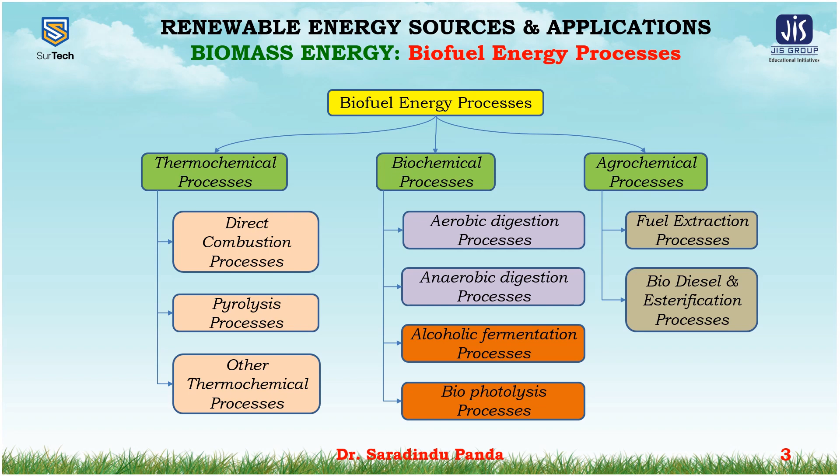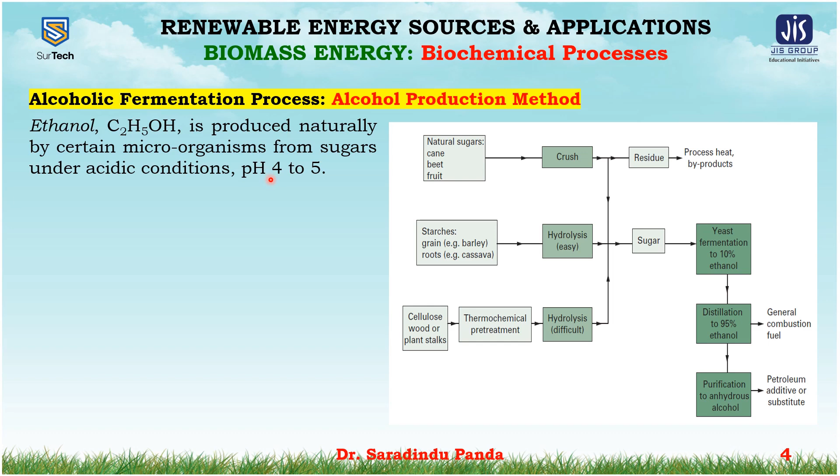In the alcoholic fermentation process, now I want to describe the alcohol production method. The ethanol C2H5OH is produced naturally by certain microorganisms from sugars under acidic conditions where the pH is 4 to 5. This alcoholic fermentation process is used worldwide to produce alcoholic drinks.

The most common microorganism, the yeast Saccharomyces cerevisiae, is poisoned by ethanol C2H5OH concentration greater than 10%, and so stronger concentrations up to 95% are produced by distilling and fractionating as shown in the figure.

Hydrolysis, the crush, and the yeast fermentation give 10% ethanol, then the distillation process will occur, then we will get 95% ethanol, then purification occurs to anhydrous alcohol, which is the petroleum additive or substitute.

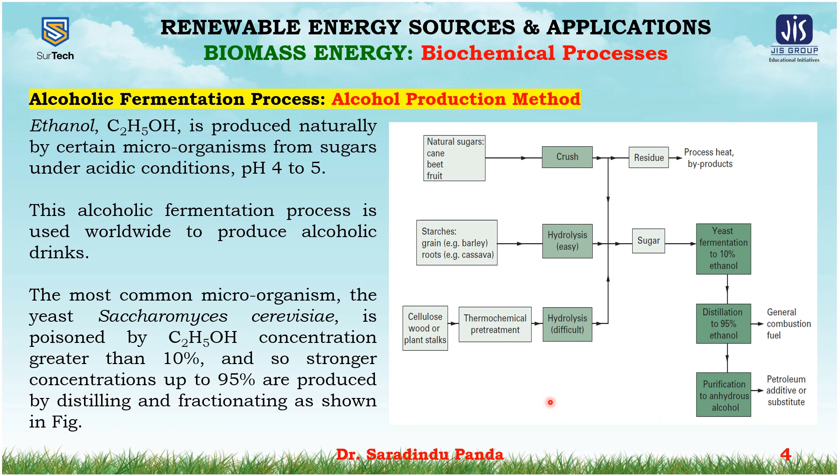When distilled, the remaining constant boiling point mixture is 95% ethanol and 5% water, which is shown in the figure. The anhydrous ethanol is produced commercially with azeotropic removal of the water by an extra process such as co-distillation with solvents such as benzene or the use of molecular sieves.

Only about 0.5% of the energy potential of the sugars is lost during the fermentation, but significant amounts of process heat are required for the concentration and separation processes. This process heat may be provided from the combustion or gasification of otherwise waste biomass and from waste heat recovery.

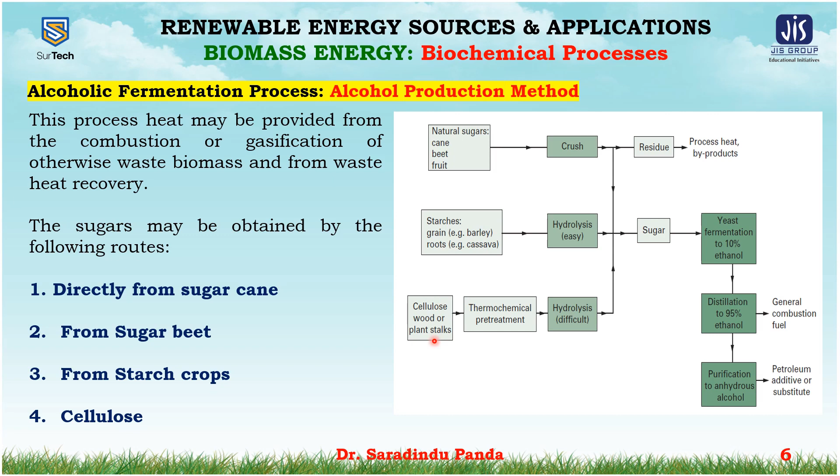The sugars may be obtained by the following routes: directly from sugar cane, from sugar beet, from the starch crops or grains or roots, and the cellulose. Now come to the sugar cane directly. In most cane producing countries, commercial sucrose is removed from the cane juices, and the remaining molasses is used for the alcohol production process as shown in the figure.

These molasses themselves have about 55% sugar content, but if the molasses have little commercial value, then ethanol production from molasses has favorable commercial possibilities, especially if the cane residue, that is called the bagasse, is available to produce the process heat.

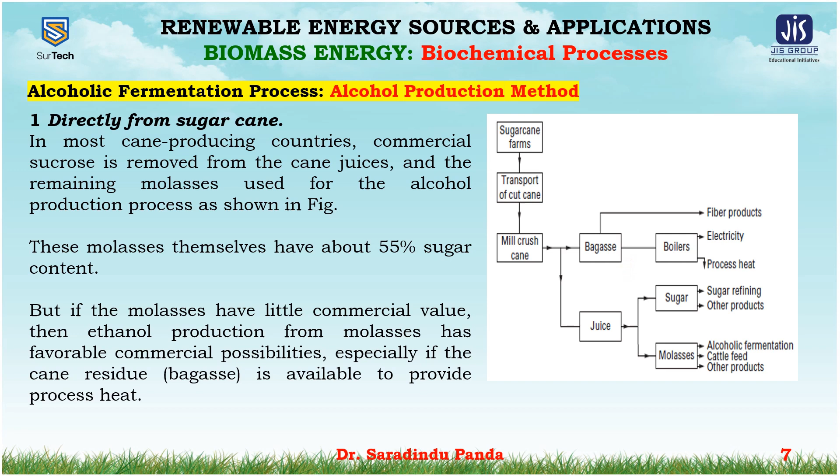The major reaction is the conversion of sucrose to ethanol, that is C6H12O6 to 2C2H5OH plus 2CO2. In practice, the yield is limited by other reactions and the increase in mass of yeast. Commercial yields are about 80% of that predicted by the above equation. The fermentation reactions for other sugars, just like glucose or sucrose C6H12O6, are very similar.

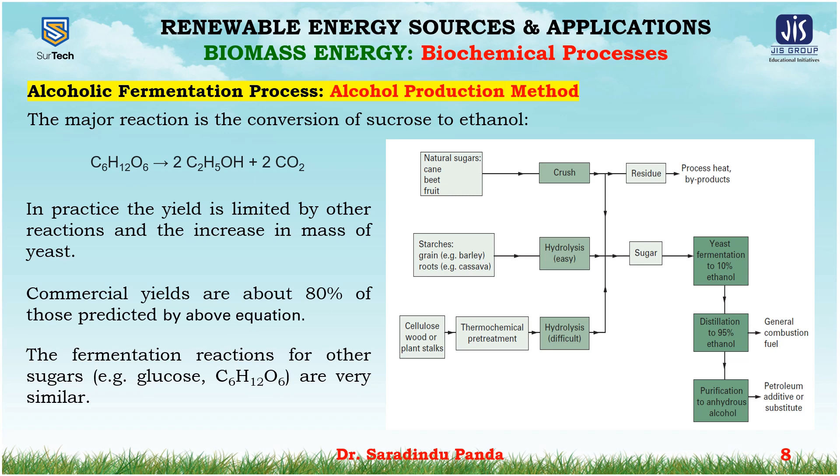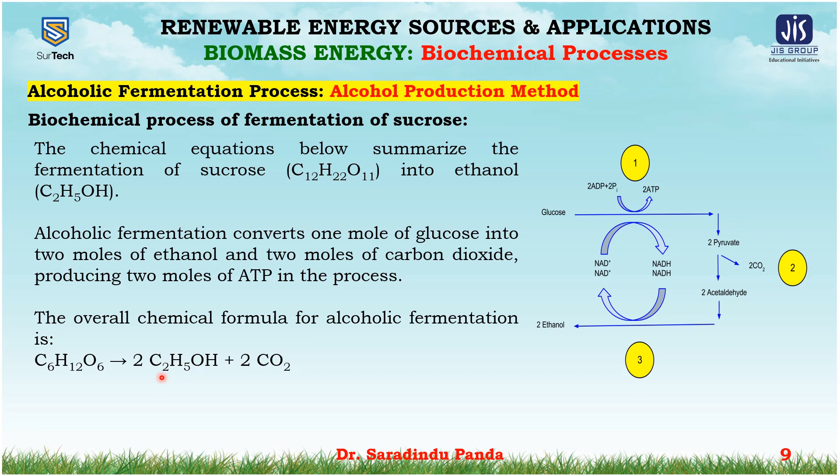The biochemical process of fermentation of sucrose. The chemical equations below summarize the fermentation of sucrose into ethanol. Alcoholic fermentation converts 1 mole of glucose into 2 moles of ethanol and 2 moles of carbon dioxide, producing 2 moles of ATP in the process. ATP means adenosine triphosphate. The overall chemical formula for alcoholic fermentation is C6H12O6 to 2C2H5OH, that is ethanol, plus 2CO2. Sucrose is a sugar composed of a glucose linked to a fructose.

In the first step of alcoholic fermentation, the enzyme invertase cleaves the glycosidic linkage between the glucose and the fructose molecules. C12H22O11 plus H2O plus invertase gives 2C6H12O6. Next, each glucose molecule is broken down into 2 pyruvate molecules in a process known as glycolysis.

Glycolysis is summarized by the equation like this: C6H12O6 plus 2 ADP plus 2 Pi. Pi is the inorganic phosphate, plus 2 NAD+. NAD means nicotinamide adenine dinucleotide ion.

Then we will get 2CH3COCOO−, which is called pyruvate, 2 units of pyruvate, plus 2 ATP plus 2 NADH plus 2 H2O plus 2 H+. So CH3COCOO− is called the pyruvate, NADH is the reduced nicotinamide adenine dinucleotide, and Pi is the inorganic phosphate.

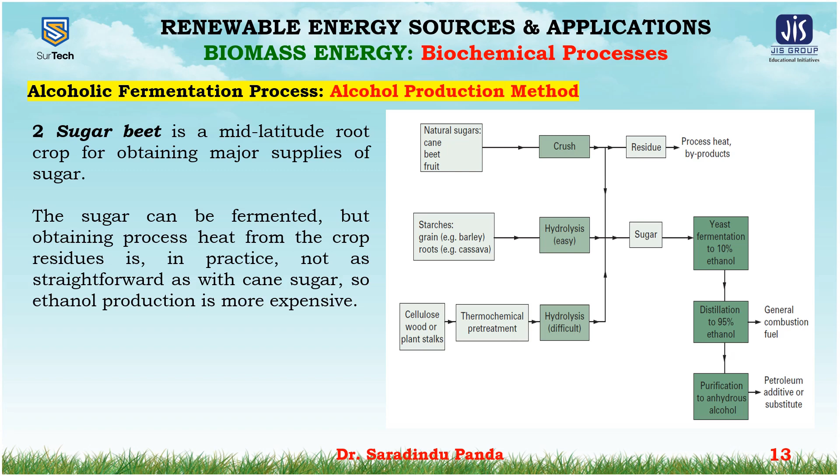Third one is the starch crops. Starch crops means grain and cassava, which is shown in the figure, can be hydrolyzed to sugars through hydrolysis. Starch is the main energy storage carbohydrate of plants and is composed of two large molecular weight components. One is amylose and the other one is amylopectin.

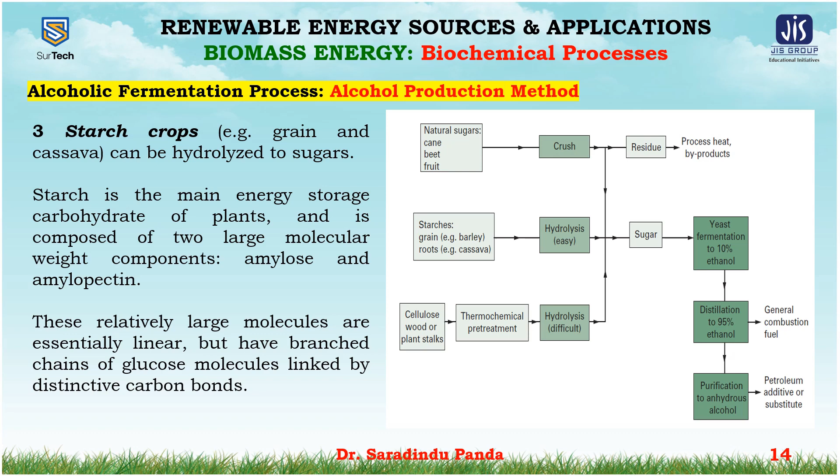These relatively large molecules are essentially linear but have branched chains of glucose molecules linked by distinctive carbon bonds. These links can be broken by enzymes from the malts associated with specific crops, such as barley or corn, or by enzymes from certain molds, like fungi.

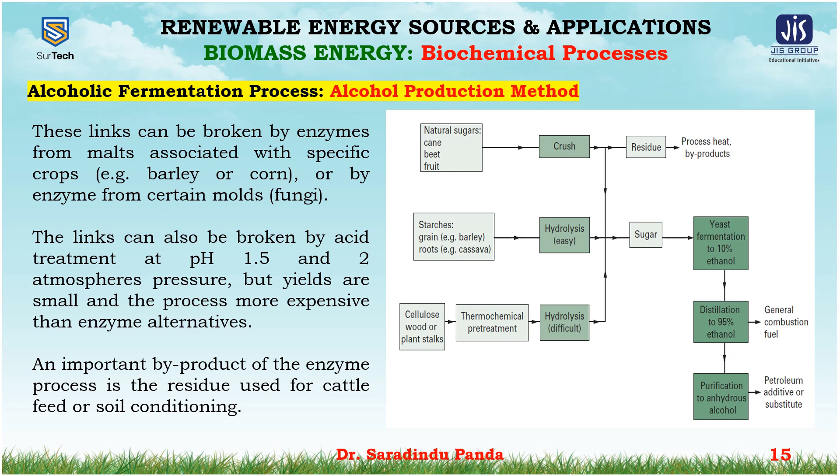The links can also be broken by acid treatment at pH 1.5 and 2 atmospheres pressure, but yields are small and the process more expensive than the enzyme alternatives. An important byproduct of the enzyme process is the residue used for cattle feed or soil conditioning.

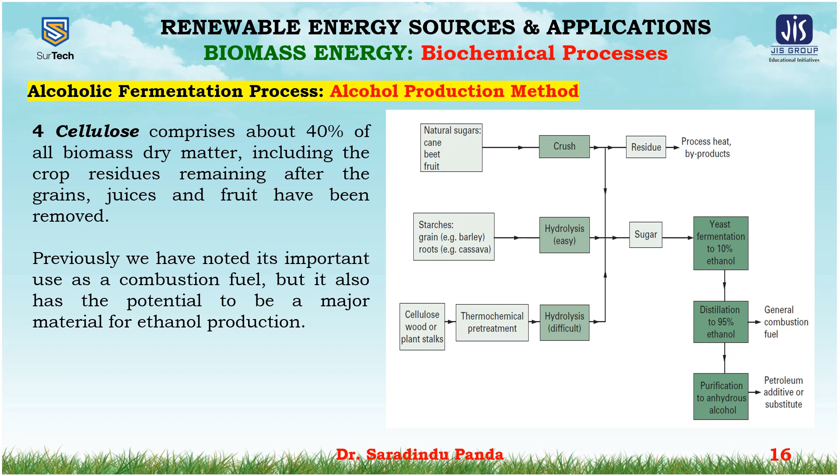Number 4 is very important, that is cellulose: wood or plant stalks. Cellulose comprises about 40% of all biomass dry matter, including the crop residues remaining after the grains, juices and fruits have been removed. Previously we noted its important use as a combustion fuel, but it also has the potential to be a major material for ethanol production. Ethanol from cellulose is therefore often called second generation bioethanol.

Cellulose, which has a molecular weight of 5 × 10^5, has a polymer structure of linked glucose molecules and forms the main mechanical structural component of the woody parts of the plant. These links are considerably more resistant to breakdown into sugars under hydrolysis than the equivalent link in starch.

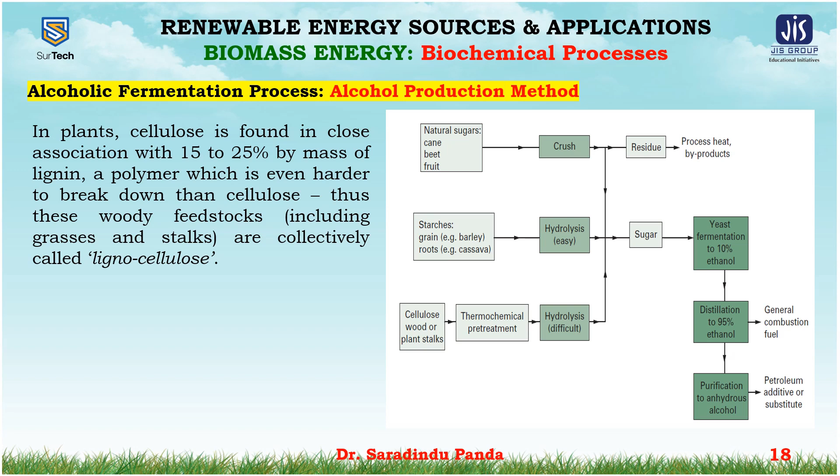In plants, cellulose is found in close association with 15 to 25% by mass of lignin, a polymer which is even harder to break down than cellulose. Thus, these woody feedstocks, including grasses and stalks, are collectively called lignocellulose.

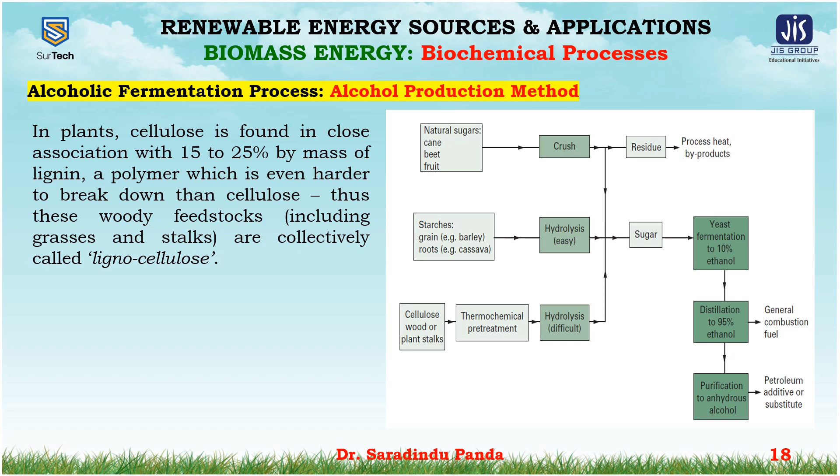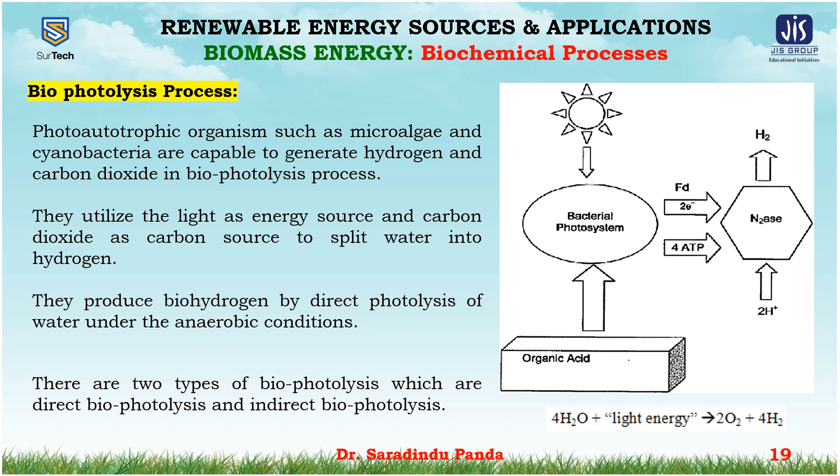There are two types of biophotolysis: direct biophotolysis and indirect biophotolysis. Hydrogen production by the direct biophotolysis process uses solar energy and the photosynthetic system of algae to convert water into chemical energy, and is subdivided into one stage or two stages. In direct biophotolysis, light is absorbed by photosystem 1, PS1, and photosystem 2, PS2, which are used in hydrogen production and to transport electrons linearly to ferredoxin. The light absorbed by PS2 is required for the oxidation of water into electrons, protons and oxygen molecules.

These electrons then transfer through the electron transport chain, using the light energy absorbed in PS1, to ferredoxin and to the hydrogenase enzyme without involving the intermediates of carbon dioxide fixation. These enzymes then catalyze the recombination of protons and electrons to evolve hydrogen gas. This mechanism is also referred to as one-stage direct photolysis, where biohydrogen is produced directly from water and solar energy via the algal photosynthesis system. The equation: 2H2O is converted to hydrogen ions, electrons and oxygen. Then 4H+ plus 4e- gives 2H2, the hydrogen generation.

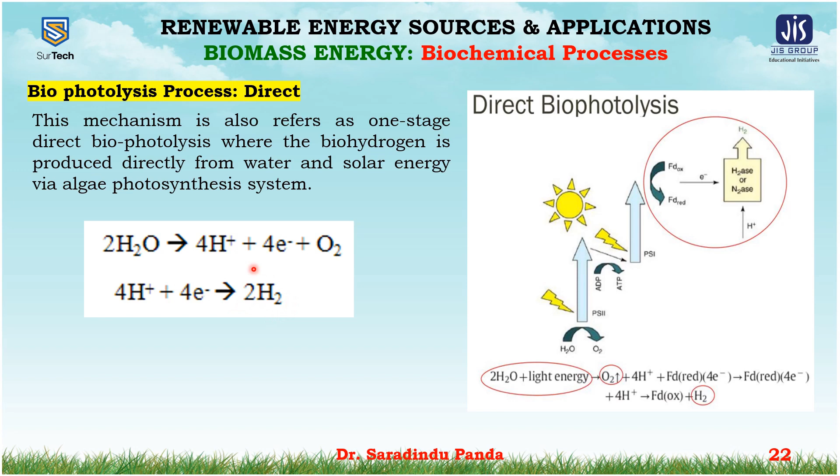There is a major limitation for this process, which is the sensitivity of the FeFe hydrogenase enzyme to oxygen produced by photosynthesis, which greatly inhibits the activity of the enzyme for evolution of molecular hydrogen, resulting in low yield of biohydrogen. Meanwhile, two-stage direct biophotolysis is a continuous, upgraded process from one-stage direct biophotolysis, in which oxygen is removed through respiration using exogenous or endogenous substrates, such as the sulfur deprivation method.

Now come to the indirect biophotolysis method. Indirect biophotolysis is the production of hydrogen from water via the microalgae and cyanobacteria photosynthetic system, converting solar energy into chemical energy, which is hydrogen, by two steps in series. The first step is biomass production through the photosynthetic system, followed by the second step, which utilizes the carbohydrate-rich biomass for hydrogen-producing fermentation. First step: 6H2O plus 6CO2 plus light gives C6H12O6 plus 6O2. Then C6H12O6 plus 2H2O gives 4H2, acetic acid CH3COOH, and carbon dioxide.

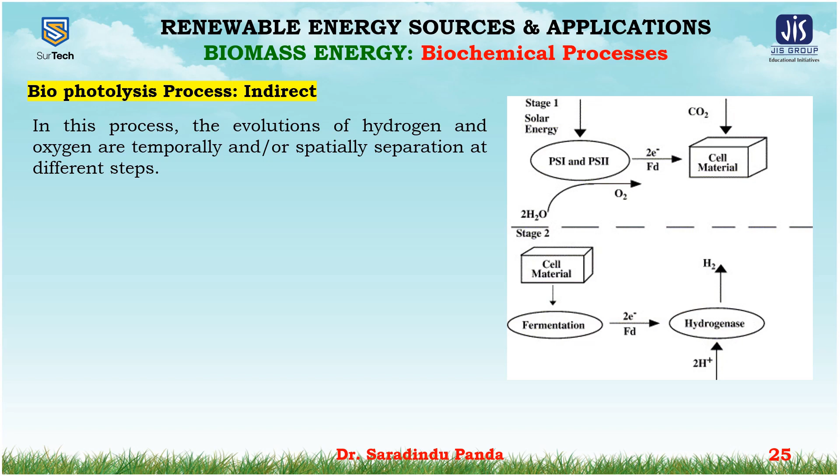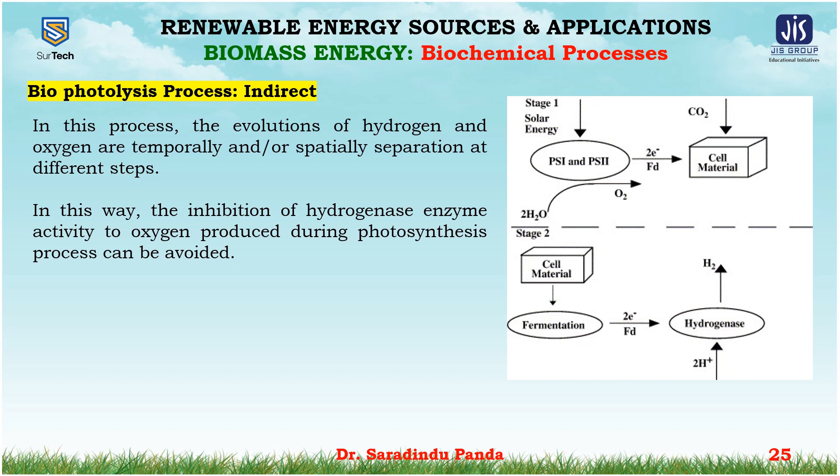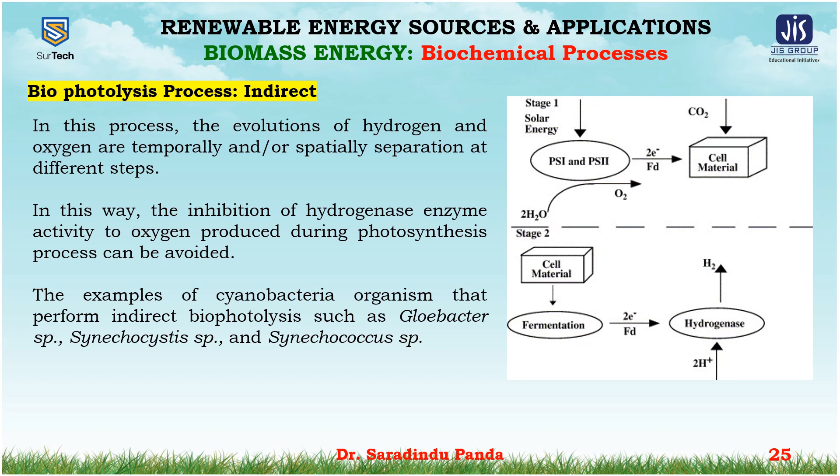In this process, the evolution of hydrogen and oxygen is temporally and/or spatially separated at different steps. In this way, the inhibition of hydrogenase enzyme activity by oxygen produced during photosynthesis can be avoided. Examples of cyanobacteria that perform indirect biophotolysis are Gloeobacter species, Synechocystis species and Synechococcus species.

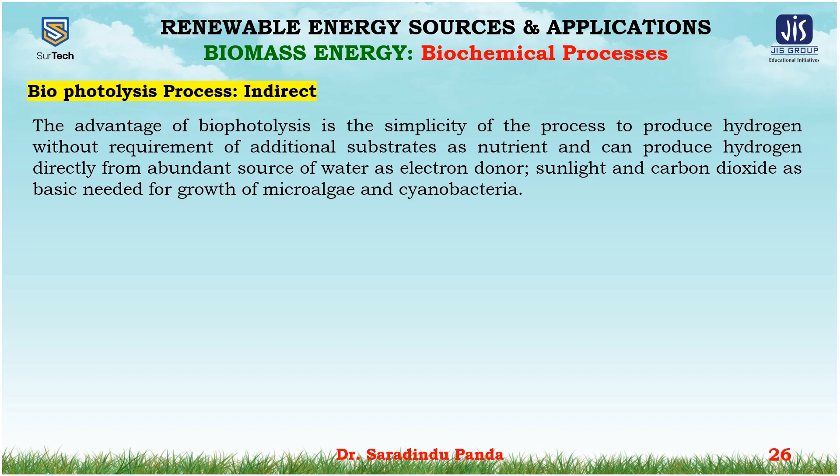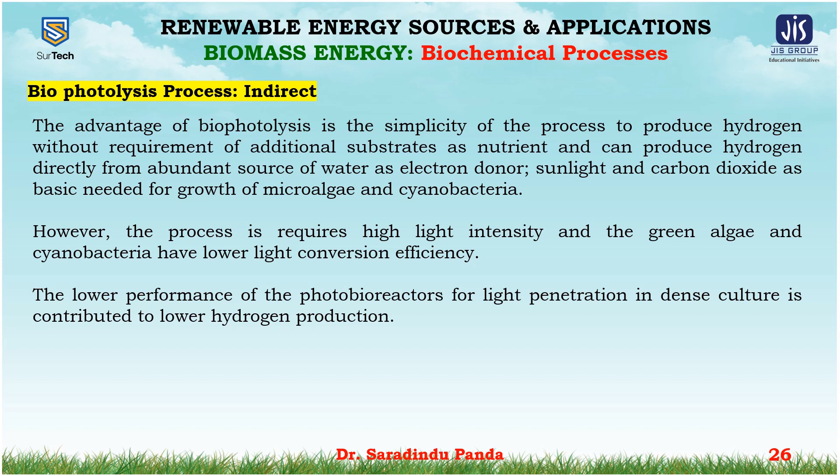The advantage of biophotolysis is the simplicity of the process, producing hydrogen without requiring additional substrates as nutrients, directly from abundant water as electron donor, with sunlight and carbon dioxide as the basic needs for growth of the microalgae and cyanobacteria. However, the process requires high light intensity, and green algae and cyanobacteria have lower light conversion efficiency. The lower performance of photobioreactors due to light penetration in dense cultures contributes to lower hydrogen production.